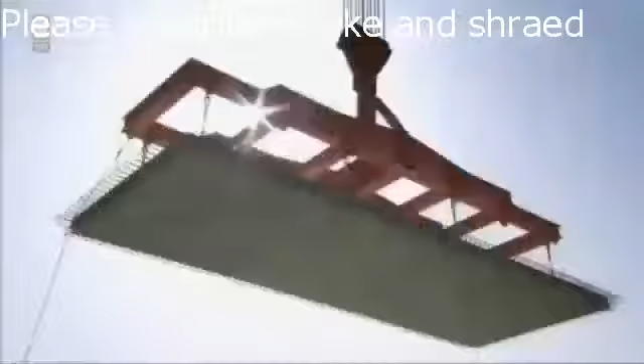Here's the catch: the highway has to go underwater. It would become the deepest immersed highway on Earth. Oh, they also have to build a couple of bridges. And did we mention the typhoons?

These tugs are towing a contradiction: a tunnel segment that's both colossal and fragile. Come back, close. Slow down. A raft of techno breakthroughs and untested results.

Bound for a place few know, to entice the world to visit, and even sway the choice for the Olympic Games.

Busan is South Korea's second largest city, 4.2 million people. Bigger than Madrid, closing in on Milan, and as hectic as Manhattan. South Korea is an Asian tiger, and Busan makes it roar.

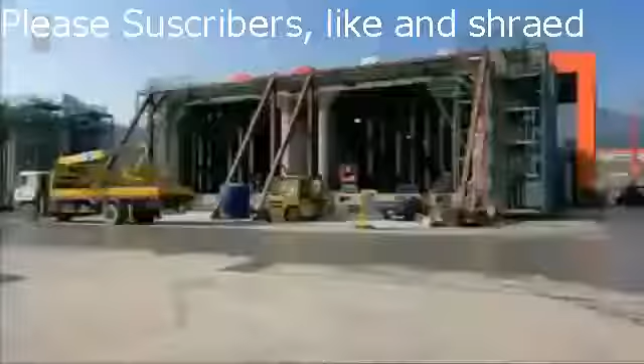Plunging 48 meters below sea level, the link will boast the deepest immersed roadway in the world. The tunnel will be composed of 18 mammoth segments, each as long as 2 football pitches and as heavy as an aircraft carrier. Wide enough to carry 2 lanes of traffic each way, with an access tunnel between.

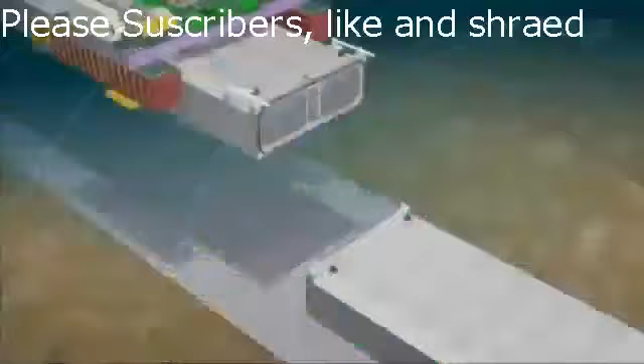That's the concrete reality. Now, here's where it gets dicey. Each segment has to be carefully towed into position, then carefully sunk to the seabed. And all the segments have to align within 35 millimeters, less than a thumb's width.

Weather adds its own demands. This site is exposed to the open sea. There are always high waves, and the water is deep as well. It is wide open to the Northwest Pacific Ocean, so we have extreme exposure conditions for the construction period. So we've got to be ready for whatever that sends us, like big swell waves, strong winds, and even occasional typhoon.

Building a tunnel like none ever seen will take techniques like none ever tried. Yet the Koreans have never built an immersed tunnel.

But this country has. The Dutch have 5 centuries of experience at holding back the sea.

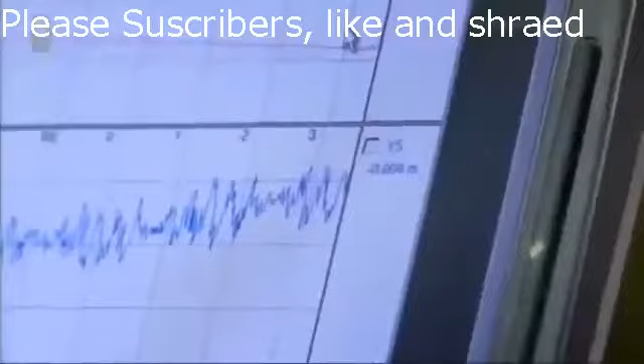The Dutch company had a zest for a challenge, and the confidence that they could solve these problems. And so we were able to trust each other. But that's how we ended up working with the Dutch.

This is what confidence looks like.

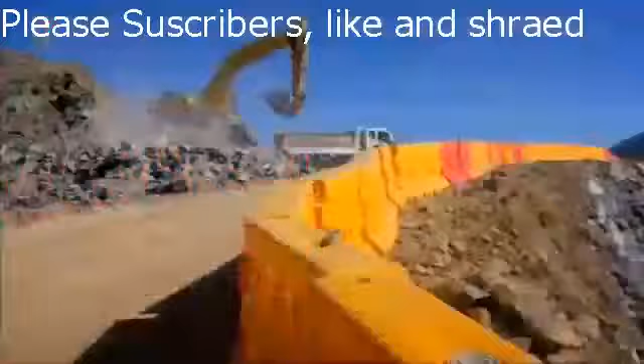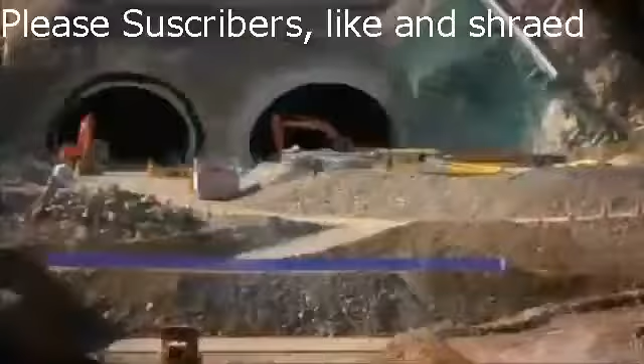Construction begins with the tunnel entrances, one on Gadeok Island, the other near an uninhabited island. From here, engineers will dig down to 12 meters below sea level to meet up with the undersea tunnel segments. But they won't tunnel through the seabed itself, because the gradient would be too steep for driving. Instead, Peter's crew will lay prefabricated tunnel segments on the seabed.

First, engineers dredge a trench where the tunnel will rest. To buttress the foundation, they bore concrete columns into the seabed, stopping 3 meters shy of bedrock. The reason is earthquakes; avoiding bedrock will give the tunnel crucial flexibility. The segments will rest on a bed of gravel to ensure an even surface.

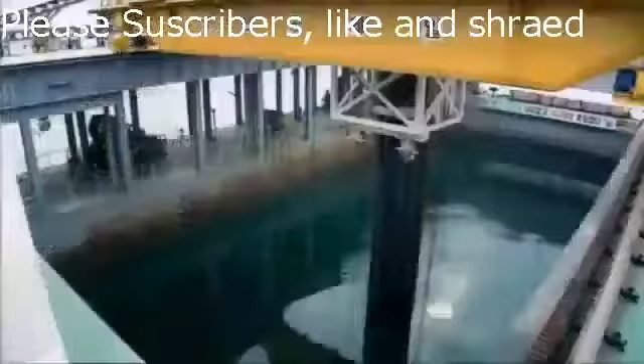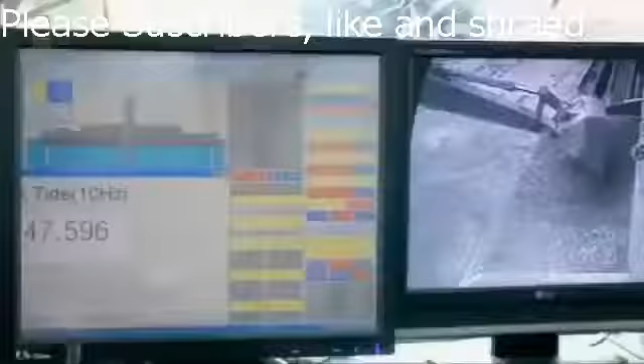Because the bed determines the exact height of each tunnel segment, the gravel must be placed with pinpoint accuracy. Later, the entire tunnel will be covered with thousands of tons of crushed rocks to protect it from collisions with ships or anchors.

Because the tunnel segments will be prefabricated, the first challenge is finding land for a construction yard. Not an easy task in Busan. If you look around, there's not a single metre of flat land anywhere that a contractor can use as a base for the construction period.

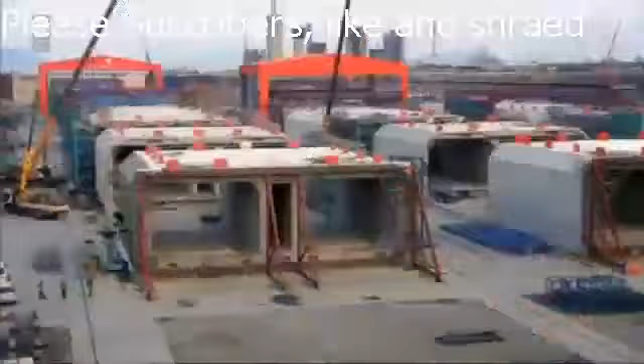From the tunnel site, the closest spot lies 35 kilometres away. It's big enough to build up to 5 tunnel segments at a time. Each segment weighs about 48,000 tonnes and is made of 8 subsections, each twice as long as a London bus.

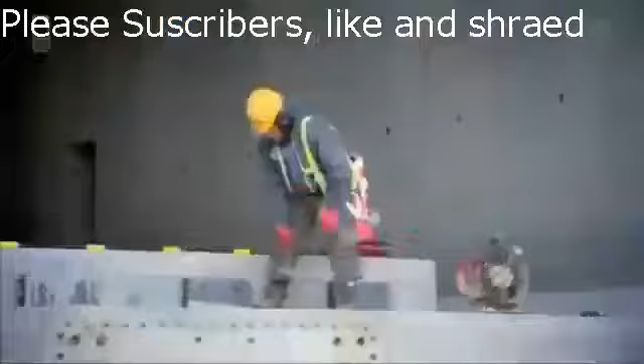Anyone with a basement knows water can penetrate concrete joints, potentially disastrous in an underwater tunnel. But each giant section is cast without a single joint, thanks to Korean ingenuity.

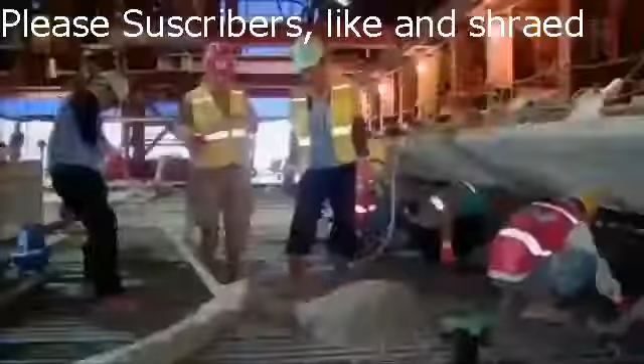We continuously poured full sections from the ground up to the top of the walls to eliminate gaps in the walls, a process lasting 24 hours.

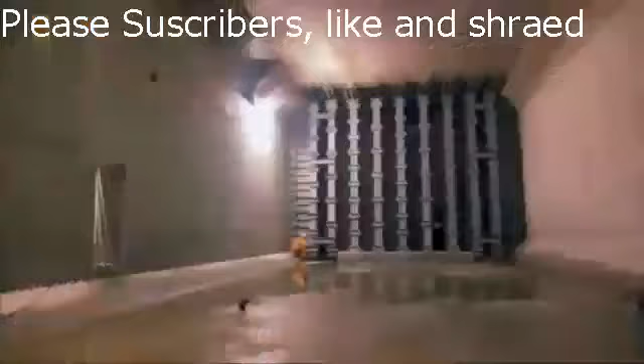After casting, the ends are sealed with steel bulkheads, a Dutch innovation best appreciated later on the bottom of Jinhae Bay. The bulkheads are watertight because these babies are about to take a bath.

Flooding the dry dock will allow them to float the segments out to sea. The inundation of the dock takes approximately 48 hours.

During the first phase, we let in water until it reaches the level of the bulkhead door. Then we'll check to see if the bulkheads are leaking. Once all the leaks are repaired, or if there are no leaks, we'll fill up the dock completely.

It's enough water to fill 230 Olympic pools.

So how do you prep 48,000 tons of dead weight to float? Inside every tunnel segment, there are 6 ballast tanks, and they're filled with water.

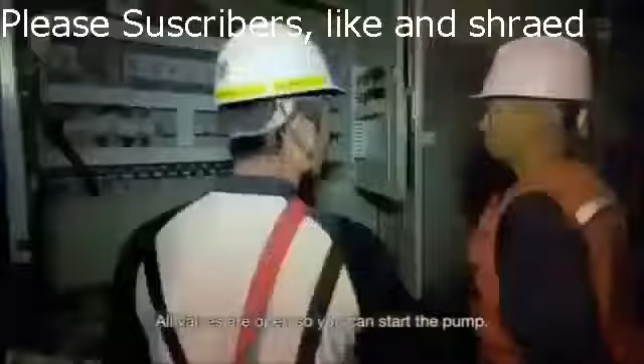To start the flotation process, we begin pumping out the water. We continue until the tunnel segment starts floating.

So what the tugboat has to do is to tow that slow. Then with the other winches at the backside, we control the tunnel element's sideways direction. Now they can begin to warp out the segment.

Removing the first segment takes brawn and finesse to avoid colliding with the dry dock.

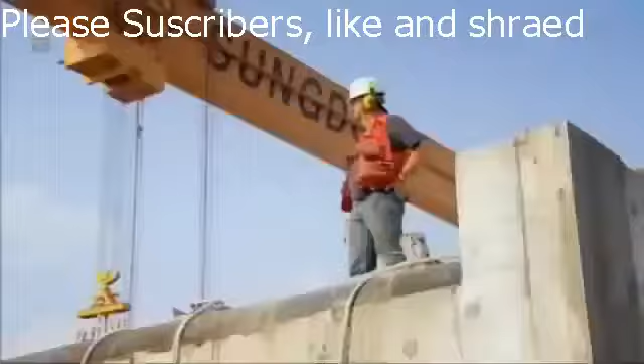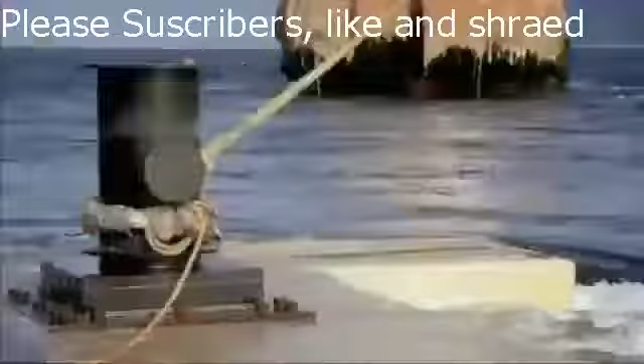Believe it or not, clearing the dry dock was the easy part.

While work continues on the undersea tunnel, the rest of the Busan-Geoje fixed link starts to rise: 2 giant bridges, one with 3 pylons, the other with 2.

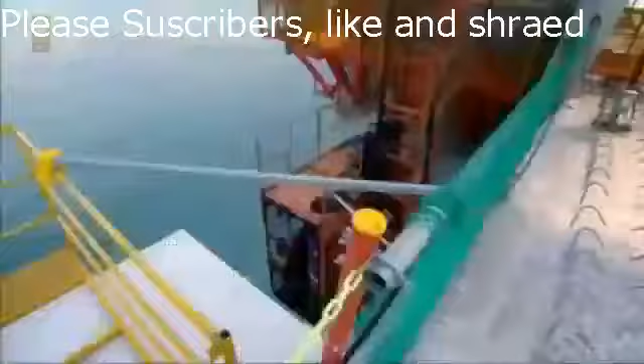At its topmost, the 2-pylon bridge will soar 156 meters above sea level, the height of a 50-story building. The span between the pylons will stretch the length of 5 football pitches, with enough room for the tallest freighters to pass under, crucial for a city that thrives on shipping for its livelihood.

The most pleasing aspect of the bridge is also the most daunting: its curved diamond shape. Curved pylons are very difficult to construct, but they're very much in harmony with the surrounding scenery, in that they bear resemblance to a mother's praying hands and to the wings of seagulls.

35 kilometers away, the first 5 tunnel segments arrive at a temporary mooring site. From here, they'll travel across Jinhae Bay to their resting place on the sea floor, already leveled and lined with gravel.

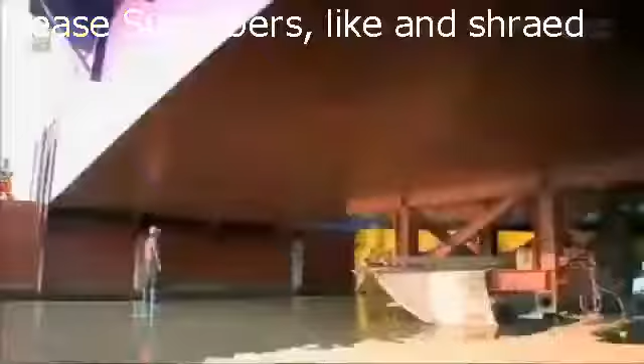And here's how they'll get there: pontoons the size of a mansion, Dutch designed, Korean made. One pontoon is positioned near each end of the tunnel segment. After arrival at the tunnel site, mammoth winches on the pontoons will lower the segment to the seabed. At least, that's the theory, because it's never been done in the open sea.

A specialist diving team prepares the first tunnel segment for the immersion operation. Divers test connections for data systems and power supplies, standing by, and remove marine growth from the bulkhead.

Finally, they install steel wires underneath the tunnel segment, crucial for positioning during immersion. In a good position now, we can come up on the wire.

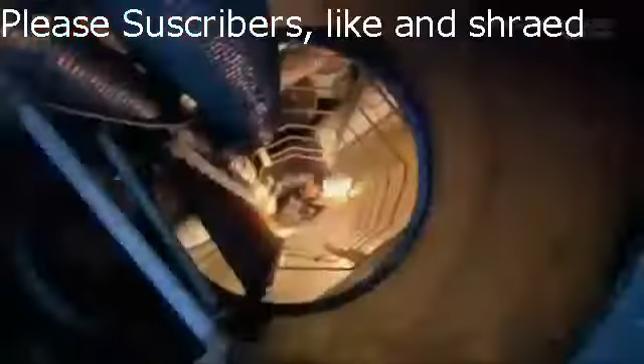Above water, the crew are also adding a temporary access tower, so workers can enter the segment in case of trouble with the ballast tanks. Over, the tunnel is clear.

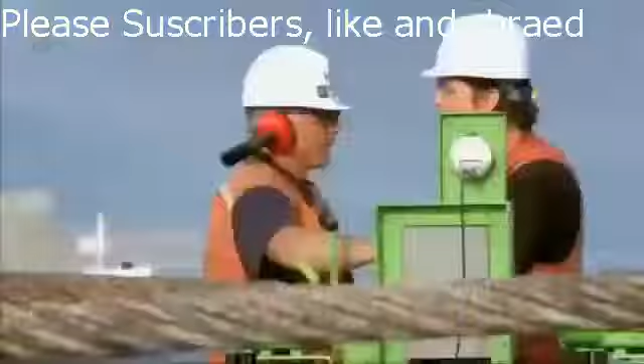Every problem has to be anticipated, because if things go south, they won't get a second chance. What we do doesn't have anything to do with luck. We know what's involved, we know how the process works, and we have the feeling we control the whole process. Not quite.

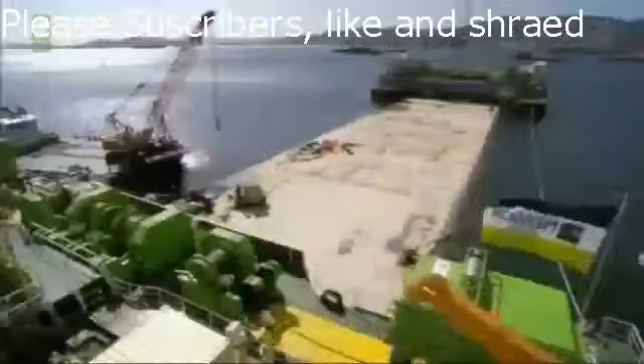Back in Holland, the rest of the immersion team stands by to fly out. In all, 56 men wait for Peter to say go, and he's waiting for a forecast.

When the wind blows from the south, swells roll in from the Pacific. Because we're situated offshore, we have to deal with waves, and these waves can be pretty fierce. Even swells barely 30 centimeters high pack so much force they could fracture the subsections that form the tunnel segment.

Throughout its journey, the segment will be at the mercy of the waves, so the team needs 3 days of calm seas.

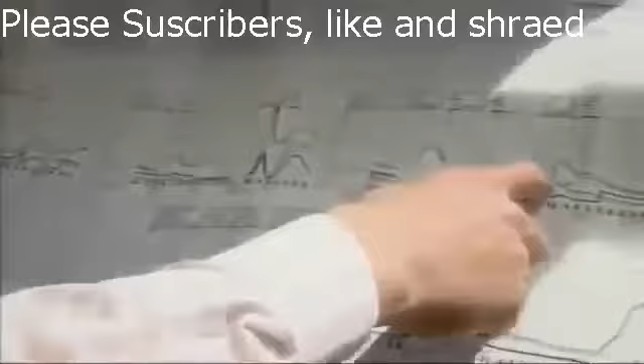Strukton looked around for a forecaster, but few dared to stick out their neck for such a costly guess. Then a Danish company seized the challenge. They came up with a model to predict waves as small as 10 centimeters, up to 5 days out—a stunning breakthrough in forecasting.

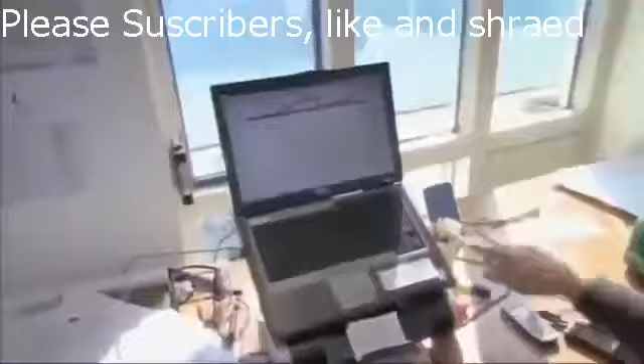That means we're able to say, tomorrow we can do an immersion. And that means we're able to put people on the plane today, really on a last-minute basis. It takes away a big risk for us and for our client.

We've got the weather. They're all showing the same prediction. The swell still not as bad. I would say we have a go. Green light. We'll try, then we'll try, right? Okay, thank you, yes, bye-bye.

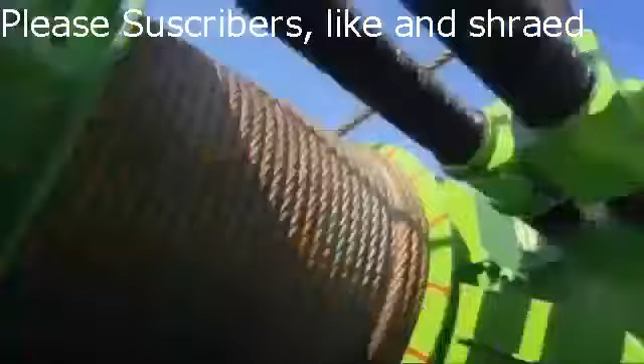Ahead lie 48 hours of tension for the boss. Six months of work rides on steel threads, and a forecaster's guess. Tonight, no one will sleep soundly.

After a cautious voyage at 3 kilometers an hour, the first tunnel segment arrives at Gadeok Island, the starting point of the tunnel.

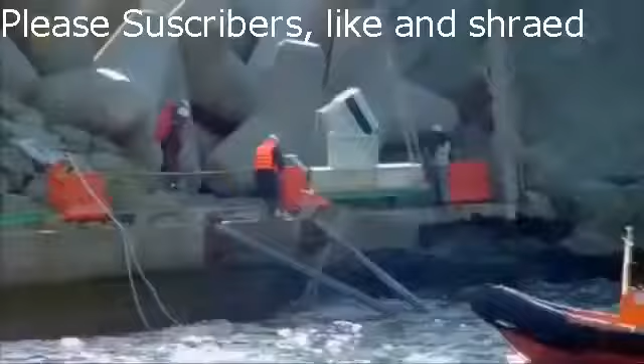But working along shore poses a huge challenge. 48,000 tons have to be maneuvered into a slot with just 1 meter of clearance underwater on each side. One false move and the segment could get jammed in the rocks. Controlling the segment are 14 steel cables, anchored in the rocks and on the seabed.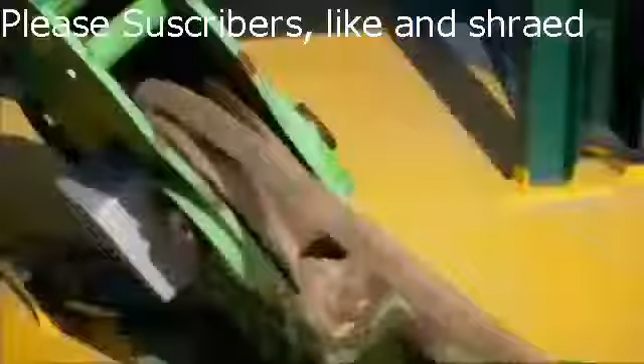Aligning the segment takes painstaking accuracy. Surveyors take readings using a system of prisms and mirrors mounted on the access shaft and the survey tower. It's all new to the Koreans, so it takes time getting used to the technology.

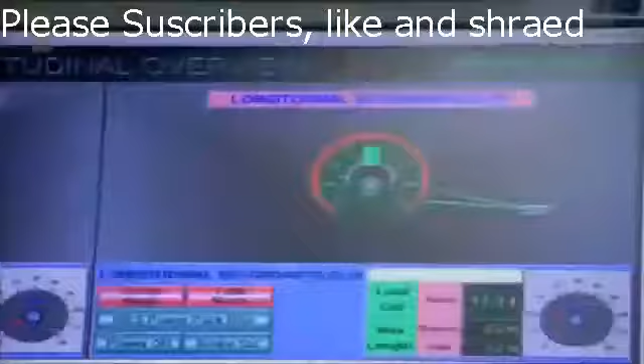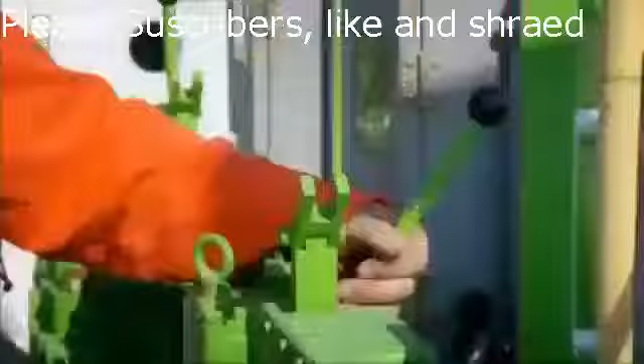The ordeal will take all day and end either with an engineering triumph or a 48,000-ton disaster. With so little clearance and so much at stake, the segment moves at a snail's pace. After a journey of 35 kilometers, it's now just 4 meters from the abutment.

We've worked really hard for half a year to prepare for this moment. 56 of our people are here to execute this operation. The Koreans are excited and tense because they've never witnessed this. We've done it more often, but still, it's a very special moment.

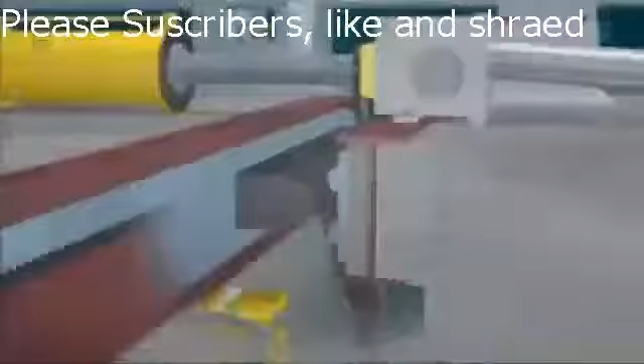Till now, steel plates have protected the leading edge of the segment. Behind them is a component as crucial as it is fragile: a rubber gasket to ensure a watertight connection with the abutment.

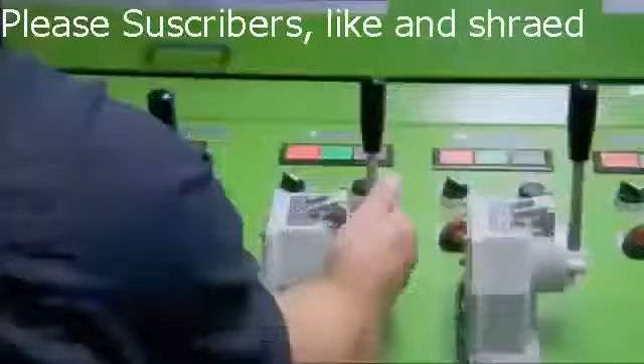Now they're ready to begin the descent. Operated by remote control, the ballast tanks slowly fill. The command post monitors everything via remote control cameras, on the pontoons and inside the tunnel segment.

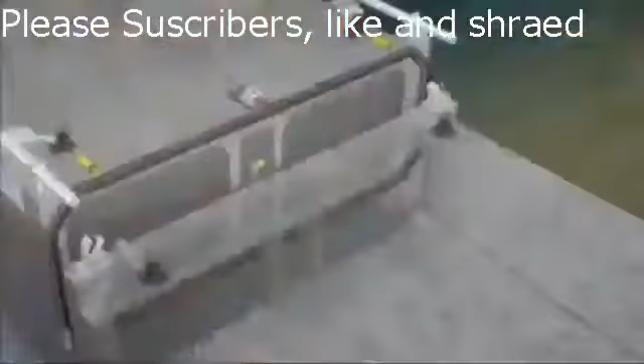The segment must align with the mouth of the tunnel to within 3.5 centimeters. You can imagine that if this segment were placed 10 centimeters off, and you did that 18 times, you'd end up 2 meters off on the other side. Well, that wouldn't be very good.

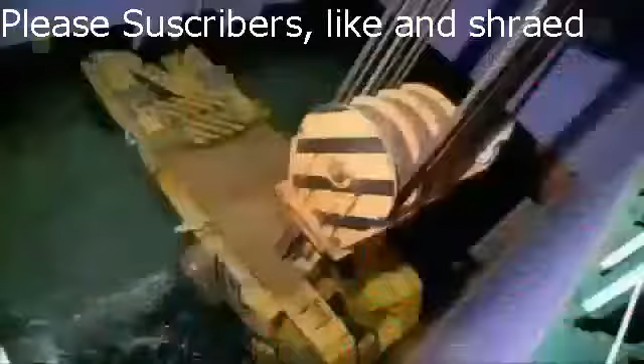Seven hours later, touchdown. The segment now rests just 50 centimeters from the abutment, the mouth of the landward tunnel. To close the gap, engineers have installed a pair of powerful hydraulic jacks. Linking the jacks and applying tension closes the gap.

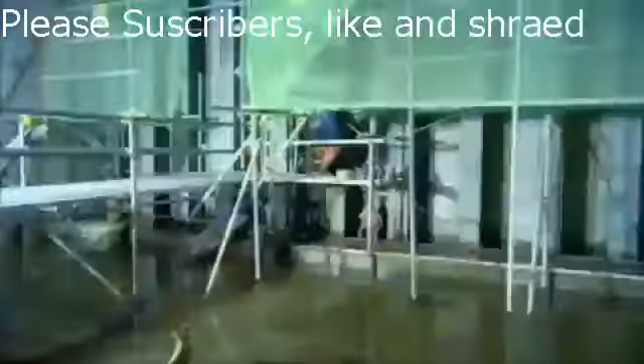The final stage begins from the landward side. A wall of water nearly 3 meters wide separates the segment from the abutment, what they call the immersion joint. Opening this valve will force the water out.

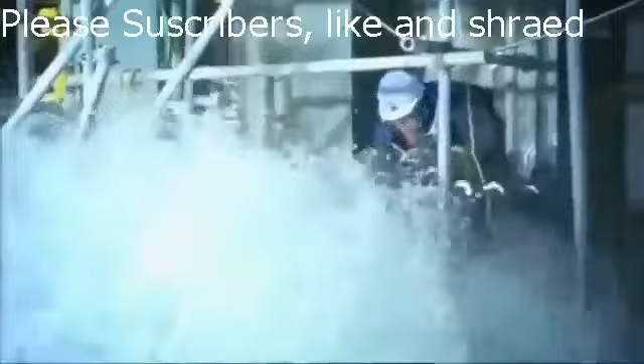As the immersion joint empties, external pressure will further compress the gasket for a watertight seal. The echo from the bulkhead reveals the water level in the joint. With the water drained, they can open the bulkhead door.

But the lock's jammed. You know that he was going to break. Huh? Did you know that? Because you took the toolbox with you.

This calls for cruder technology.

All that stands between the crew and the first immersed segment is the steel wall installed back at the dock. And here is why it's so brilliantly simple.

On other tunnels, engineers seal the ends of segments with concrete, then knock it out after immersion. But that takes time and creates debris. The modular steel bulkheads are easy to install, easy to remove, and they'll be reused on every segment and eventually recycled. Faster, cheaper and safer. An engineering trifecta.

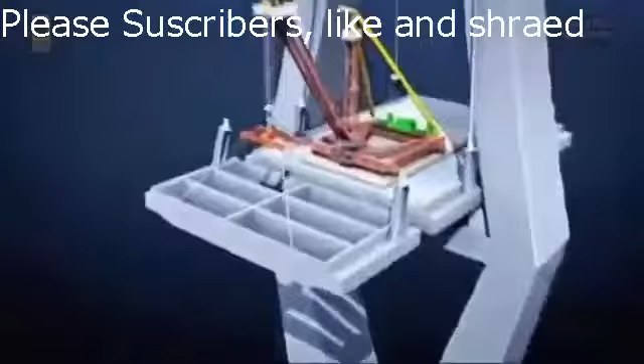Like the Busan tunnel, the bridges advance in segments, but 2 at a time, not 1. It's called balanced cantilever construction. Working outward, steel segments are laid on each side of the pylon to keep the bridge in balance. Then 2 cables are attached to brace the segments.

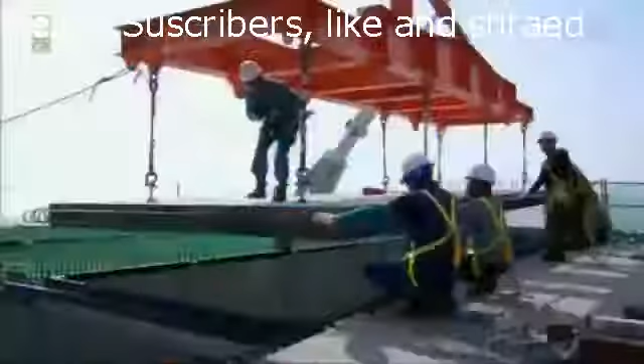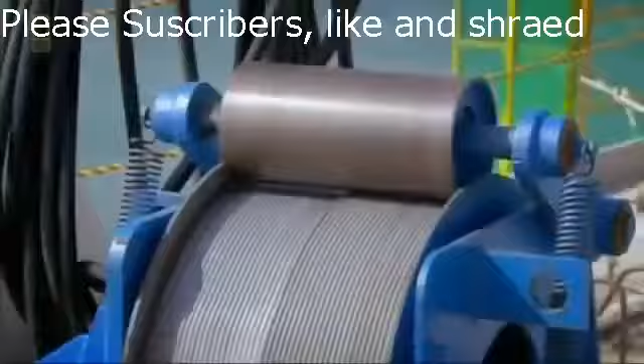Once they've done that, the derrick crane lifts up 6 precast concrete panels and places them onto the steel frame. Then they put a final post-tensioning into the cables. And we're ready then to start the whole thing over again.

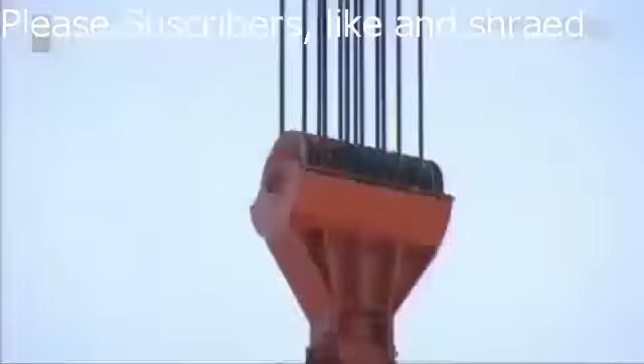Back at the tunnel, the team have installed 12 concrete segments. But now they're heading for 48 meters, the deepest water and the hardest challenge.

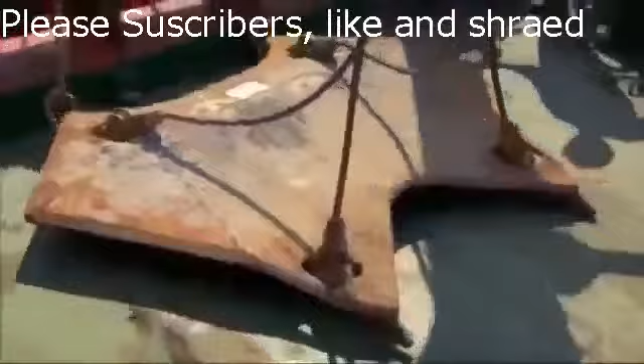Stevmantas, named for their fish-like shape, are designed to dig in where other anchors lose their grip.

Once segment 13 arrives here, 14 steel cables connected to the anchors will hold it in position. But once again, deep water raises the stakes.

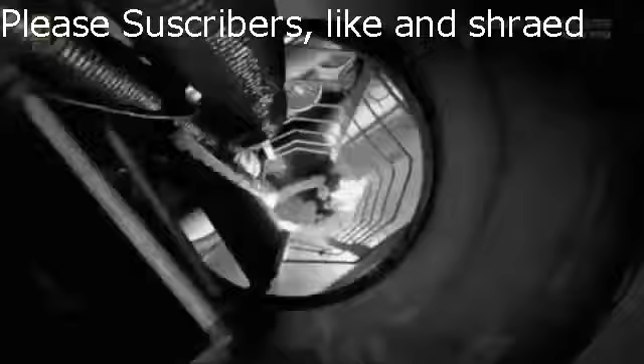Once the segment hits the bottom, suppose a problem arises with the ballast tanks. Somehow, Peter would need to get the engineers inside. On segment 1, they could use an access tower, but not in deep water.

The solution is a first in tunnel immersion: a self-propelled diving bell. Purchased in America, the sub was refitted just for this project.

I'm coming down to 15 meters, see if we can get the tunnel on sonar. This is the tunnel element here. That's something probably a bollard on the corner.

With a little boat like this that can go to 300 meters, you've got the concept of a ferry transferring people to the tunnel segment. It's 9 meters long, with room for a pilot, co-pilot, and 5 engineers. It can dock on a landing tower on the segment for watertight access to the tunnel.

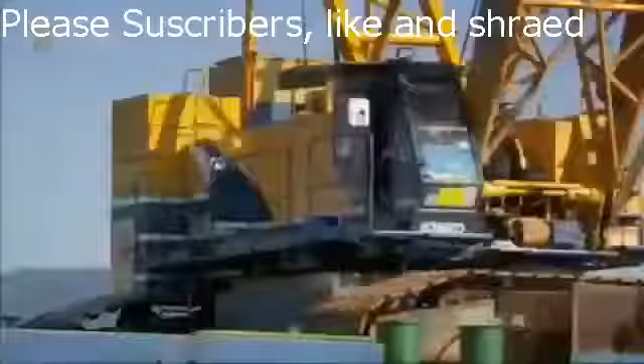Deep water poses another problem: monitoring the position of the segment as it's lowered, because one misalignment would be disastrous. To calibrate the position of the first segment, surveyors took readings from prisms mounted on the access tower. But remember, there's no access tower here. So once more, the Dutch devise a smart, simple solution.

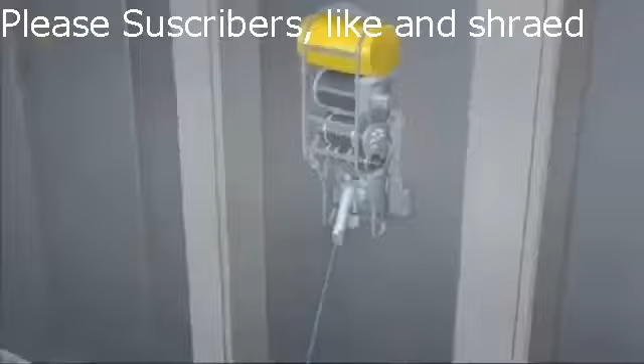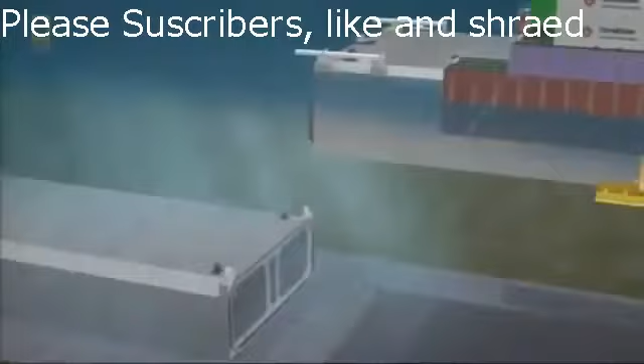It's named for what it is: a taut wire. One end attaches to the leading edge of the segment to be immersed. The other end attaches to the previous segment. The taut wire ensures the connection stays under high tension. Positioning the device is a delicate operation. This custom-made model is the only one in existence. Breaking it is not an option.

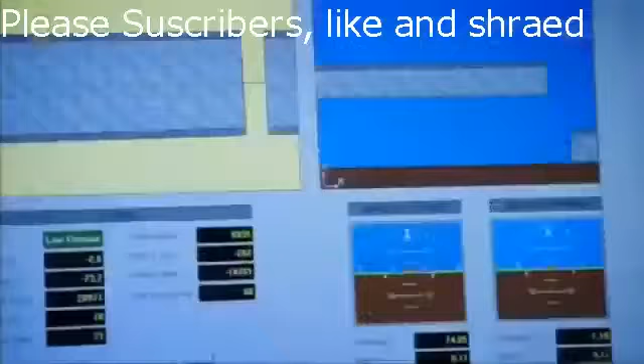When this segment descends, a computer will record the length and angle of the wire, allowing the team to monitor the segment's position. The taut wire is now under high tension between this segment and the previous one. As the segment descends, the wire automatically retracts and becomes shorter, providing exact positioning data.

To fine-tune the position of the segment on the seabed, 4 of these sensors are attached, one on each corner of the bulkhead. Another custom innovation for this project, and wait till you see how accurate they are.

The whole operation is remote controlled from the command unit on the pontoon. With one click, they start filling the ballast tanks.

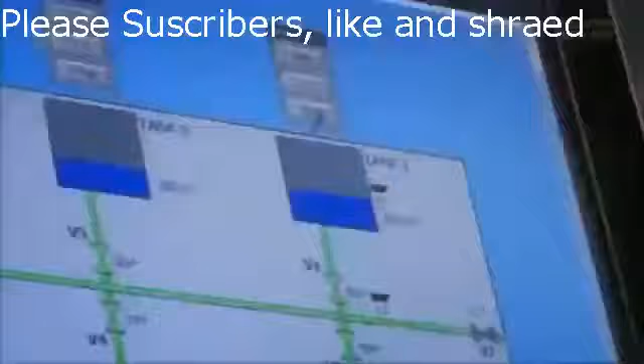You can feel the tension building up now. And then we all have one question: can we do it again? Can we get it in position? It's the same tunnel, but it's farther away from the coast. It's deeper, the weather, everything. So many aspects make it different every time, so you have to stay alert.

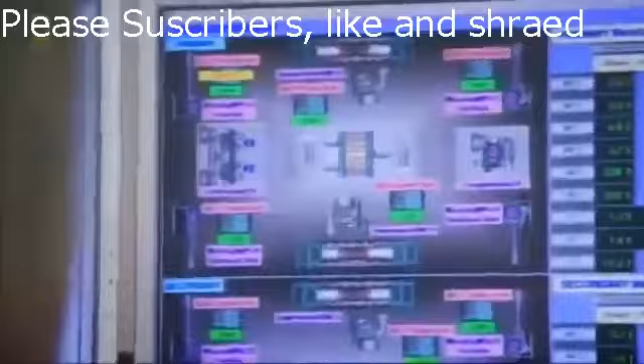All the data feeds into Peter's computer and refreshes the position of the segment every second. This is the tunnel where we have to go to. The green one is the final position, and this is where it is now. So you can see it's just below sea level.

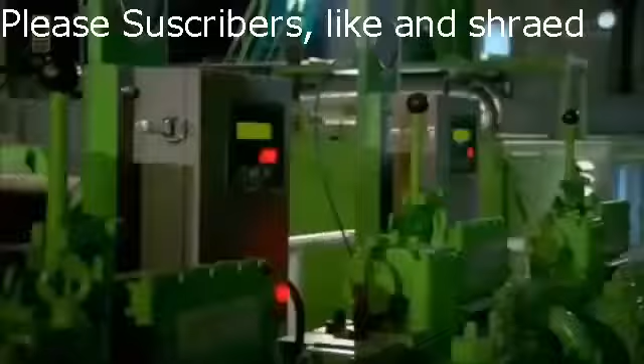Data from the winches allows him to adjust the segment during descent. It all happens like walking downstairs: one step forward, one step down. And the deeper it goes, the more careful the steps.

At this stage, where the tunnel is just a few meters underwater, there's no problem. We can still move in any direction, nothing can hit it. But when we're approaching the segment that's already on the bottom, then I have very little clearance, so the steps I make will be a lot smaller.

It takes 9 hours to descend 48 meters, just 9 centimeters a minute.

The first step in joining the segments poses another challenge and another solution. The moment a tunnel segment approaches the one ahead of it, it's moving because of the swell.

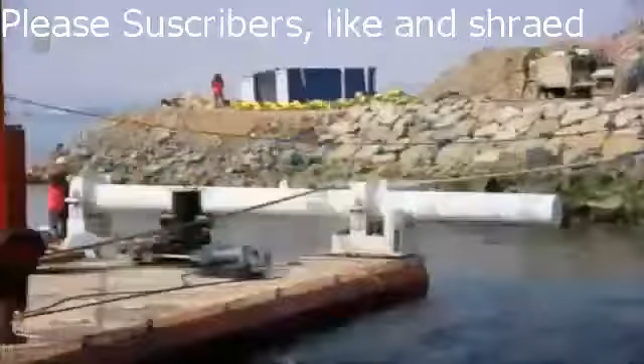So we install 2 guide beams on the top end of the segment. Another simple but elegant solution. The moment we pull them closer together, the guide beams become less flexible. The movement diminishes until the segment is motionless.

With only 50 centimeters separating the segments, and in near zero visibility, a diver connects the hydraulic jacks.

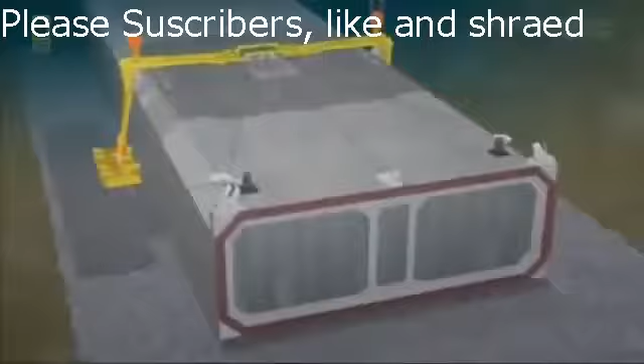The segments seem aligned, yet the slightest error on this end will translate into a big mistake at the other. But the Dutch don't miss a trick.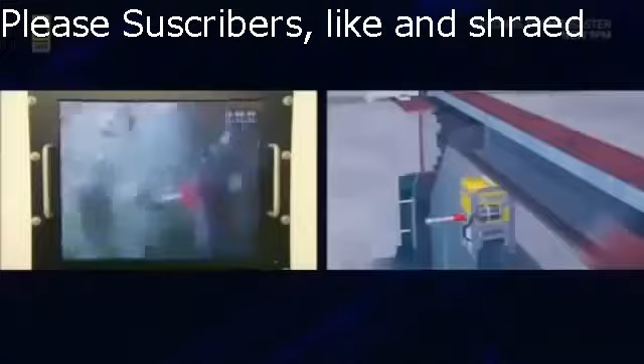The 4 remote-controlled sensors on the bulkhead now deploy. They measure the position of the segment within 1 millimeter, the width of a guitar string, and relay the data back to the command center.

Peter needs to shift 48,000 tons of concrete, 20 centimeters to the right. Even on calm days, the swell is so heavy and the segment is so long, stability is a problem.

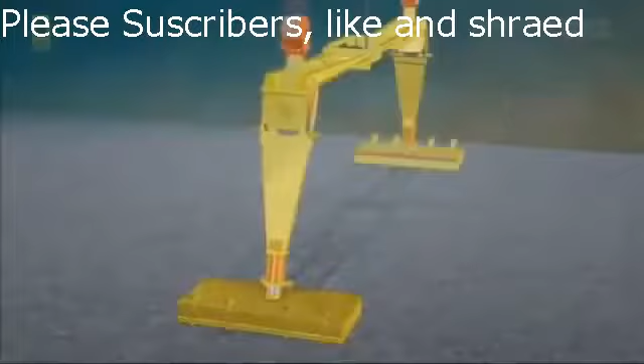The solution? The External Positioning System, or EPS. Yet another Dutch invention based on a simple idea: a pair of hydraulic legs and extendable feet to hold, lift and move the segment.

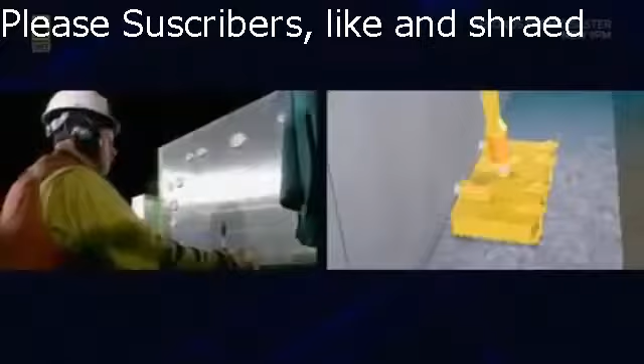Connecting each pair of legs are 4 steel cables, already installed back at the mooring site. Braced on its robot legs, the EPS laterally aligns the segment into its correct position. Now, the jacks are tightened by remote control, compressing the rubber gasket.

Done. One more segment, complete. Like the tunnel, the bridges approach the final stages.

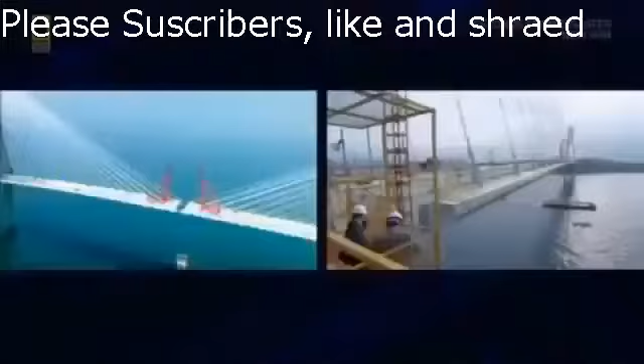Before the 2-pylon bridge can accept its last section, engineers have to perform a stretching exercise, as tiny as it is powerful. Both pylons have to be pulled back about 7 centimeters to create enough space for the key section to be placed. Once the tension is released, the final section will have a tight fit.

After 6 years, they must be eager to finish. But just like the tunnel crew, they have to move in baby steps, because this baby is a giant.

A few kilometers away, Peter's crew prepares to install their last segment. Just like the first segment, number 18 has to be maneuvered between rocks. As before, they run some of the anchor lines from the pontoons to the rocks.

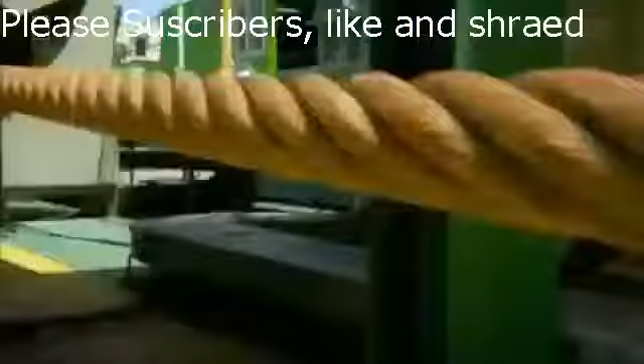Because it's so close to the island, it's very difficult to install the immersion wires. Connecting them isn't easy by any means. It's not just a matter of simply pulling them in place. With all cables attached, they can start maneuvering the segment into place.

Because this segment is extremely heavy, we can't afford even a small mistake. Light contact can cause huge damage to the segment, and that kind of damage can set back the entire project. After 3 years, they'll open the last tunnel segment tonight, if all goes well.

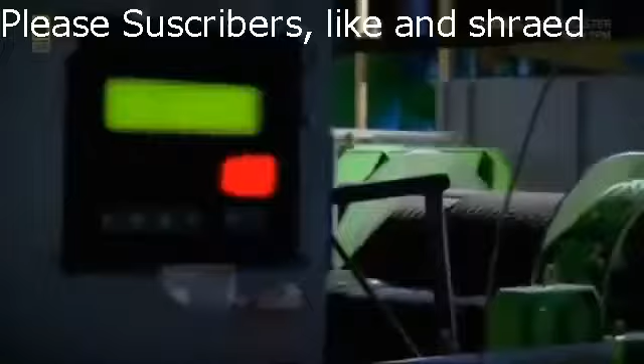The segment hits the bottom, but there's trouble. One end is sitting 28 centimeters too high. We're now trying to figure out what the cause is. We don't know yet. It's a major problem at the moment.

We're taking about half an hour to go through all the steps so that we don't miss anything, and then I'll inform you about the situation.

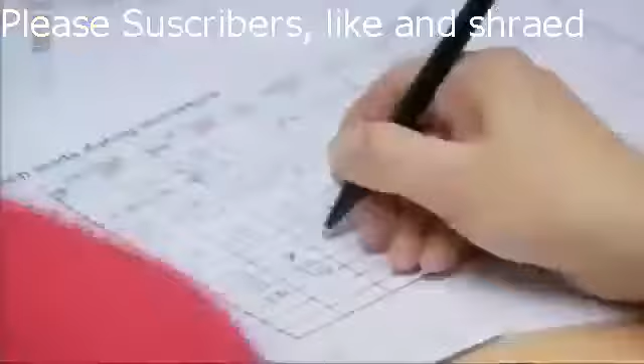The gravel foundation under one of the EPS feet is overbuilt, so they'll have to remove the foot. And the grand opening will have to wait one more day.

After final adjustments, the last tunnel segment now sits squarely on the sea floor. All that's left is entering the tunnel to seal the joint with the final segment. They'll enter via the tunnel entrance on Gadeok Island. It's the last time Peter will make this trip.

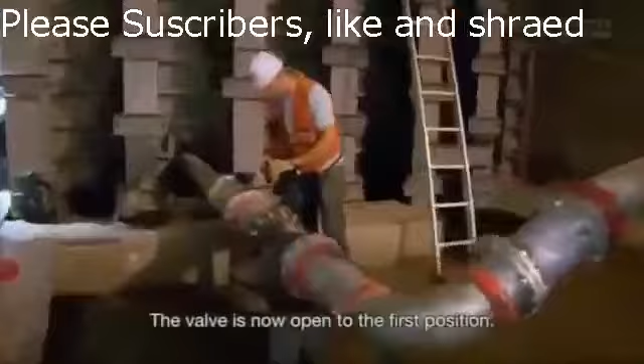The last step is pumping water out of the immersion joint, so the segment can close up for a tight seal.

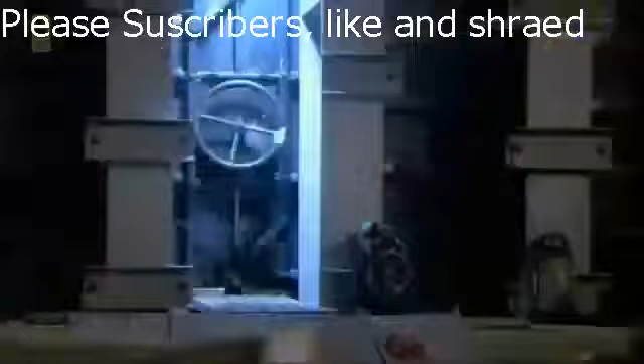Once complete strangers, now firm friends, and soon to go their own way. The end of their long journey lies behind this bulkhead door, and the honor of opening it falls to Peter.

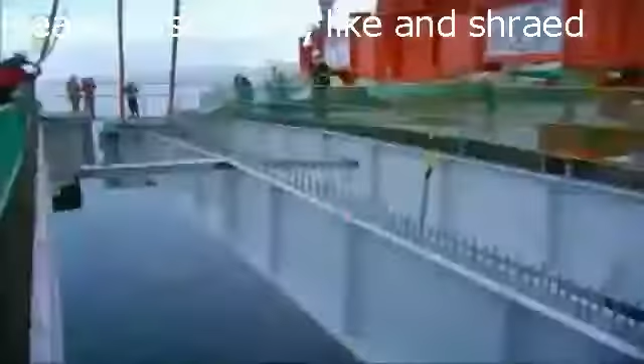Back at the bridge, the final section is lifted into place. Once the tension on the towers is released, the whole structure will be locked in place.

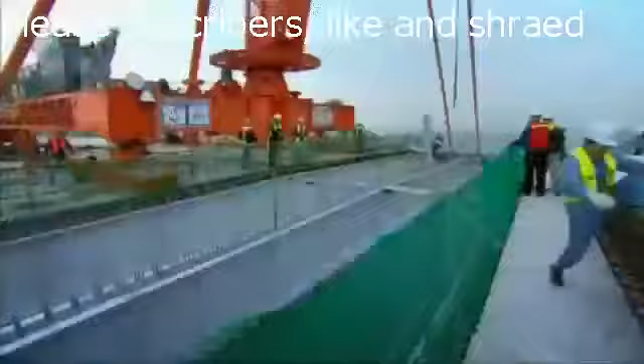With the bridge complete, all that remains is opening the final segment of the tunnel. Last inspection.

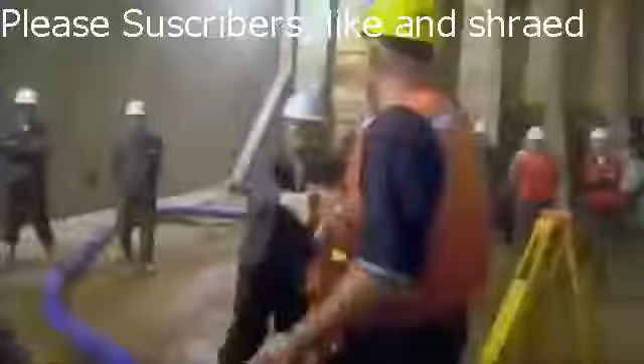Really extremely proud that we did it, and happy, of course. Happy for the whole team. It's just great. After all this time and after a difficult operation, we did it. Very emotional, yes. Fits the moment. And proud. So proud. Yeah.